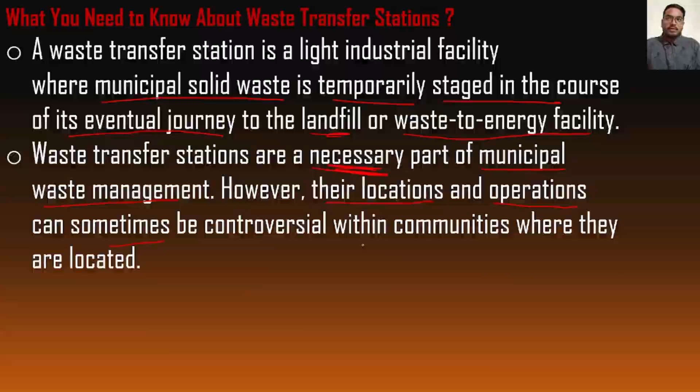Next, what is a waste transfer station? The transfer station is the central location where municipal solid waste is brought by collection crews. Once there, it is unloaded from smaller vehicles and loaded into larger ones such as long haul trucks, trains, or barges. The larger vehicles then take the waste to the final collection or disposal sites. Transferring waste from local collection vehicles into larger trailers or other transport modes reduces the cost of transportation to distant disposal sites. This frees collection-specific vehicles and crews to devote their time to actual collection activities within the community. Waste transfer stations are a key component of cost-effective solid waste transportation.

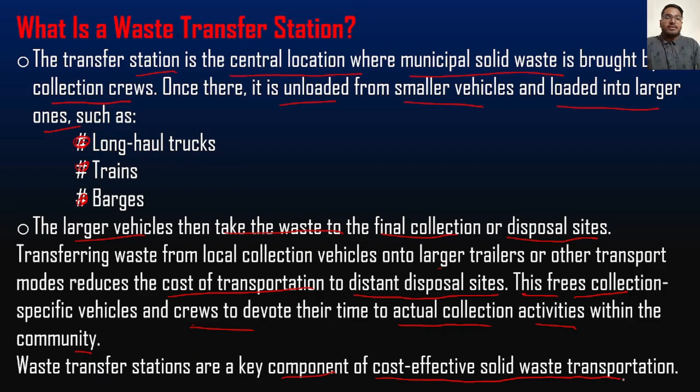How a waste transfer station works: typical activities at the waste transfer station involve unloading of the garbage trucks, screening, removal of inappropriate items such as automobile batteries, compacting loads, and reloading onto larger vehicles. So there are different stages: first unloading of the garbage trucks, then screening and removal of inappropriate items, compacting loads, and finally reloading into larger vehicles.

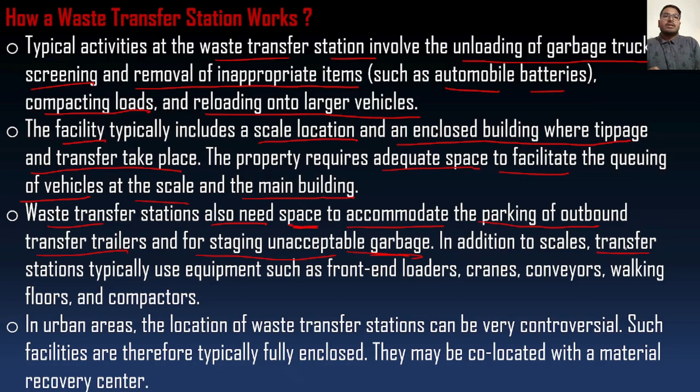The facility typically includes a scale location and an enclosed building where tipping and transfer takes place. The property requires adequate space to facilitate the queuing of vehicles at the scale and the main building. Waste transfer stations also need space to accommodate the parking of outbound transfer trailers and for staging unacceptable garbage. In addition to scales, transfer stations typically use equipment such as front-end loaders, cranes, conveyors, walking floors, and compactors.

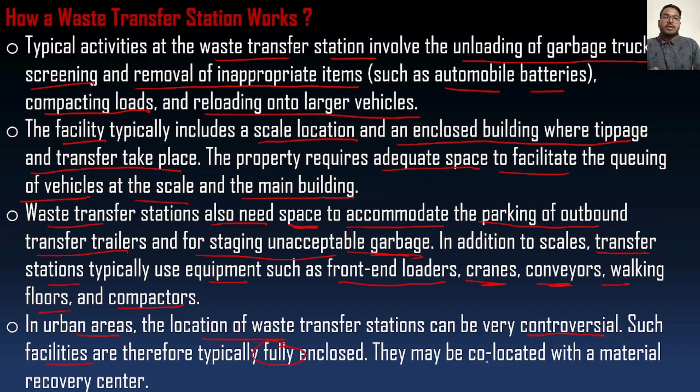In urban areas, the location of a waste transfer station can be very controversial. Such facilities are therefore typically fully enclosed. They may also be co-located with a material recovery center.

The day-to-day operations of a transfer station generally include several stages. The first is arrivals and scale: inbound commercial vehicles are first directed to the scale house, where loads are weighed and tipping fees are assessed as applicable.

Public drop-off: if a transfer station allows the public to drop off solid waste, there may be a separate queue and scale for this purpose. Some waste transfer stations provide space for the public to drop off green waste or other approved recyclables. Tipping: vehicles are unloaded at the main transfer building, and solid waste may be dropped onto the floor, into a pit, or immediately onto another vehicle. Processing.

Transfer station employees will screen the waste for any unauthorized materials. Compactors are used at some transfer stations to compact waste and thereby increase the payload of outbound trailers.

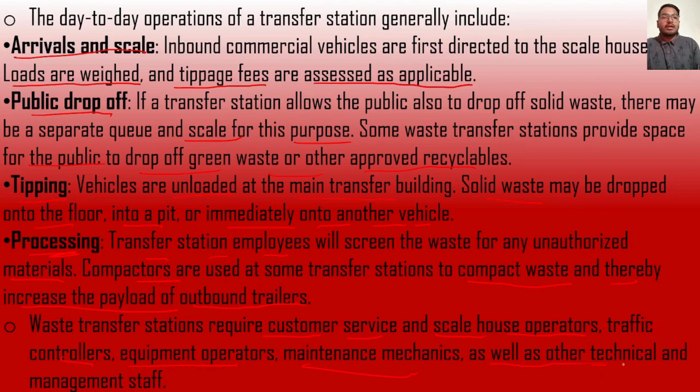Transfer stations require customer service and scale house operators, traffic controllers, equipment operators, maintenance mechanics, as well as other technical and management staff. Next, what are the benefits of a waste transfer station?

Waste transfer stations are a critical part of the waste management process. They provide a variety of benefits to the community, including fuel saving, reduction in road wear, and also lesser pollution due to fewer vehicles being on the road.

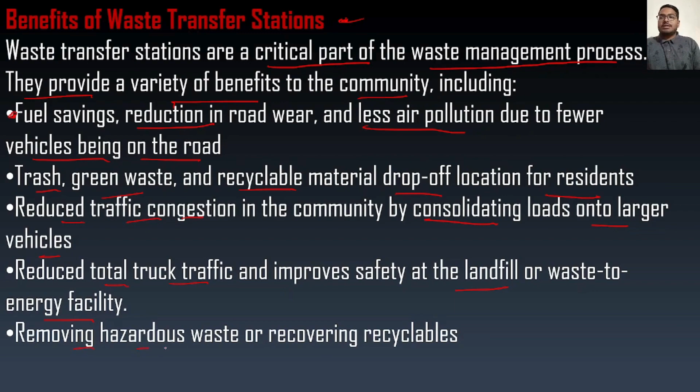They serve as trash, green waste, and recyclable material drop-off locations for residents, reduce traffic congestion in the community by consolidating loads onto larger vehicles, reduce total truck traffic, and improve safety at the landfill or waste-to-energy facility by removing hazardous waste or recovering recyclables. Next, some criticisms of the waste transfer station.

Although waste transfer stations are a vital component of modern waste management programs, the location of such stations can be a flashpoint for local communities. Residents may have a variety of concerns about the construction of a nearby transfer station. Many of these can be addressed through careful facility design.

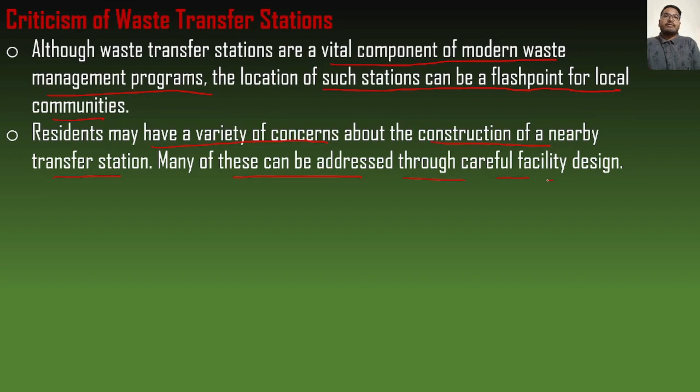Now let's look at some common concerns about the waste transfer station and their solutions. First, the concern: increased truck traffic near the station. The solution is choosing locations in industry-zoned areas with easy access to major transportation routes.

The other problem is noise associated with heavy trucks, front-end loaders, and conveyors. The solution is design details such as setbacks, sound barriers, and enclosures.

Third problem: odor from trash collection, especially if operations become backed up. The solution to this can be attention to facility and doorway location, air venting systems, and a first-in-first-out system to ensure that garbage does not remain at the transfer station longer than necessary.

Rodents, birds, and other pests are attracted by waste. The solution is ensuring the facility is enclosed, as well as creating a pest management plan that includes regular cleaning.

The fifth and final problem: litter flying from trucks or the transfer station. The solution is use of tarps and facility landscaping to create barriers against litter being picked up by the wind. So we just saw five problems, and these could be all the five solutions to the given five problems.

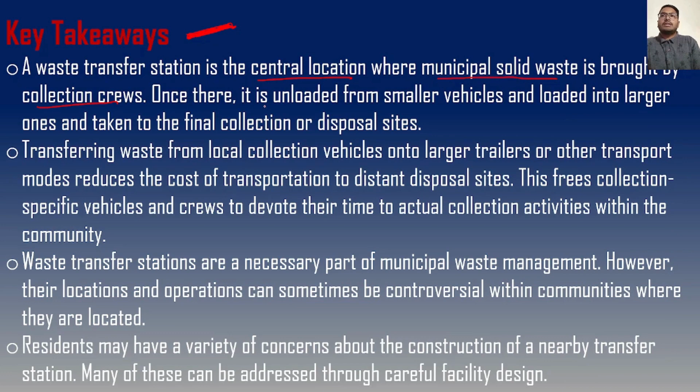Now let's look at the key takeaways of the entire video, what we saw and understood. First, a waste transfer station is a central location where municipal solid waste is brought by collection crews. Once there, it is unloaded from smaller vehicles and loaded into larger ones and taken to the final collection or disposal sites.

Transferring waste from local collection vehicles onto larger trailers or other transport modes reduces the cost of transportation to distant disposal sites. This frees collection-specific vehicles and crews to devote their time to actual collection activities within the community.

Waste transfer stations are a necessary part of municipal waste management. However, their locations and operations can sometimes be controversial within the communities where they are located. Residents may have a variety of concerns about the construction of a nearby waste transfer station, but many of these can be addressed through careful facility design.

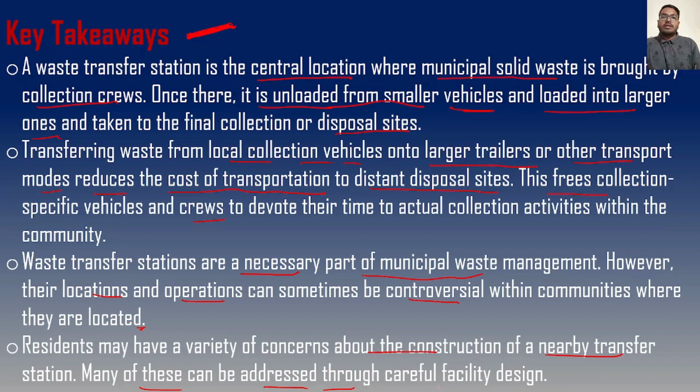So, I hope you guys understood the entire topic of the waste transfer station: what it is, how it works, how it is operated, and the different problems and solutions that are taken up to solve particular problems. I hope you understood the video.